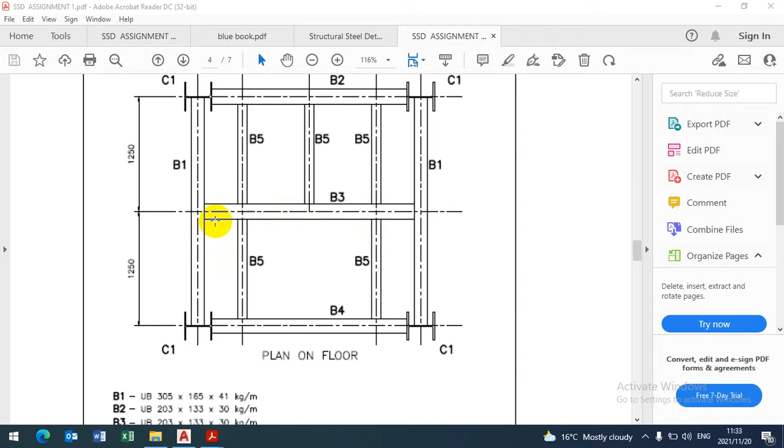Okay, so to show the notch you need to have two beams coming in like this. This will be our beam 1, and then beam 3 will be coming from the right hand side, not from the top. So we are viewing from the front. So we'll see the web with the beam, the thickness of the web is here. We'll see the flanges and at the bottom, and then we'll show the notch of beam 3 coming into beam 1. We have already done the detail of beam 1, and we are showing the holes on the web of beam 1. So that is what we are supposed to do.

So this beam 3, I'm going to move the end plate. The end plate won't be going all the way that side. It needs to be notched. Okay, so we are going to notch the beam. This is the center of the other beam, which is beam 1. If I bring beam 1 in, my beam 1 was this one. I'll copy it here, and then we rotate it in place without the holes. Okay, I'll bring beam 1 here, and then rotate beam 1 to sit that way.

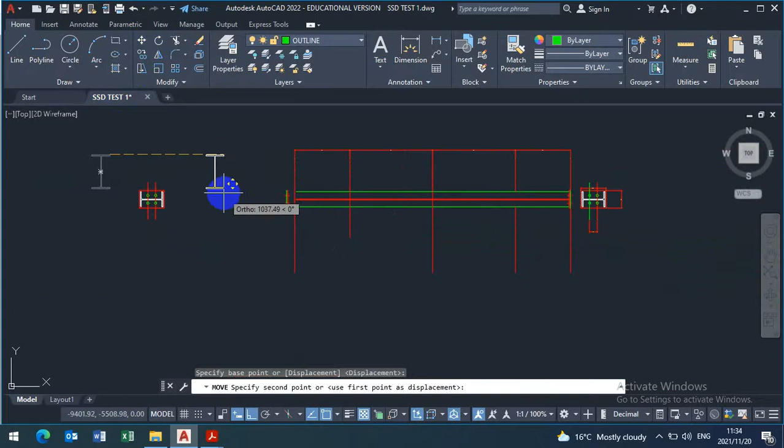It's not necessary to show the plate for beam 1 and the end plate. That is where beam 3 is coming in. I'm going to move this end plate for beam 3 and move beam 1 to align with the top of the flange here. Okay, and then that's my beam 1, and then I'll rotate this view because we are looking from the side view. We'll see something like that.

We rotate the entire end plate for beam 3, which will also change in shape. So it will be like this. And being that we are looking from the front, we are going to show the thickness of the webs. Okay, that's the top of the beam here. I'll put it here, and then you can now draw the webs. Just project from here, copy this one here, and there's already a member down here.

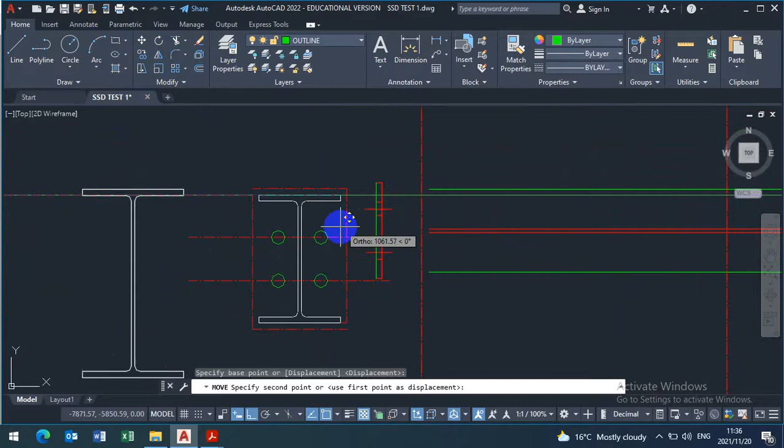This is beam 1. I want beam 3. Let's try to rotate this one and then move this member. So this one is not sitting right. This was our beam 3. Okay, and then it must be on top. So I'll move it closer to be in line with that one. The top of the beam is here. We want something like that. That is beam 3 from the front.

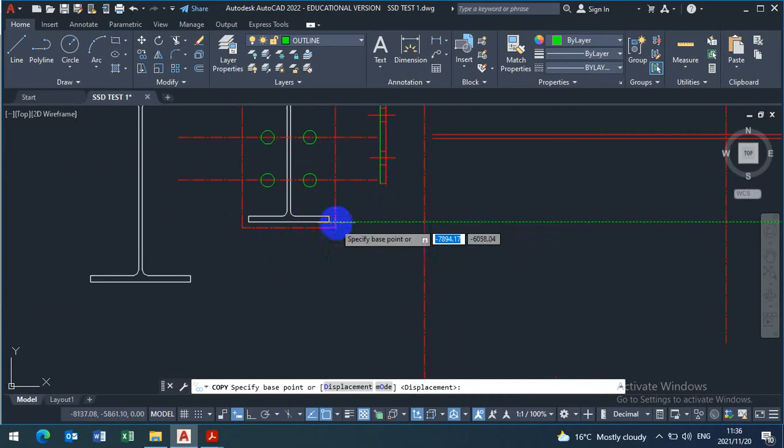Then you're going to move this one here, and then you can copy that one, because now we are on the front where we see the depth. From the top we saw the width. That's why we turned it the other way. So from the front this is the right way, and you're going to extend this. That's where the beam is ending.

Then extend your lines to meet with the beam here, and then you can now trim that part and trim this part here. And then trim. This will be out. Alright, so the thickness of these plates we are going to change. Also the position of the holes will change. We are now working from the front view. So extend.

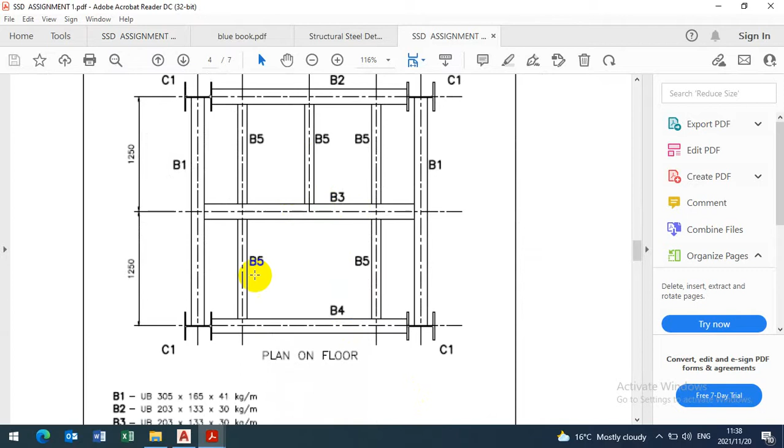Let's finish the notching part. With the notching part, you need to know that this beam here is coming in here, so you can now move this away.

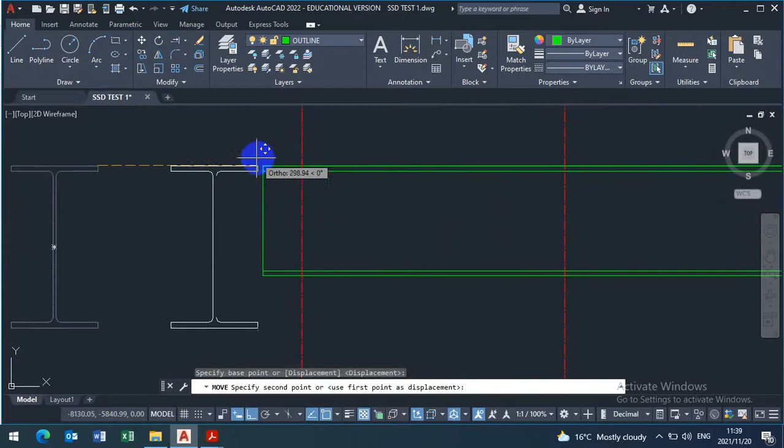The end plate detail, you can move it somewhere this side, and then try to bring this beam near. Okay, there must be a small clearance there before you notch, of like 2 to 3, so you can offset 2 to 5, they say. If I use 2, that's the clearance, and then move the beam, which is the main beam, to that point. Okay, and then we have to now notch this beam.

We have to notch beam 3. How do we know what point to notch beam 3? Because beam 3 needs to come and sit here. Okay, it needs to come and sit on the web according to what we did on beam 1. Beam 3 was coming inside here. We have done the detail of that part. Okay. The beam 1 was ending with the columns here. That was on the column.

But when we look at beam 3, I've already mentioned that it's touching here on the web. So you need to have a notch, but the notch you can't show on the top view. So if we are looking from this other side of the beam, you will see the plate here, and the plate here, and the plate here with the holes. In fact, we'll just show the holes on the web. Okay. All right, so now notching of this beam.

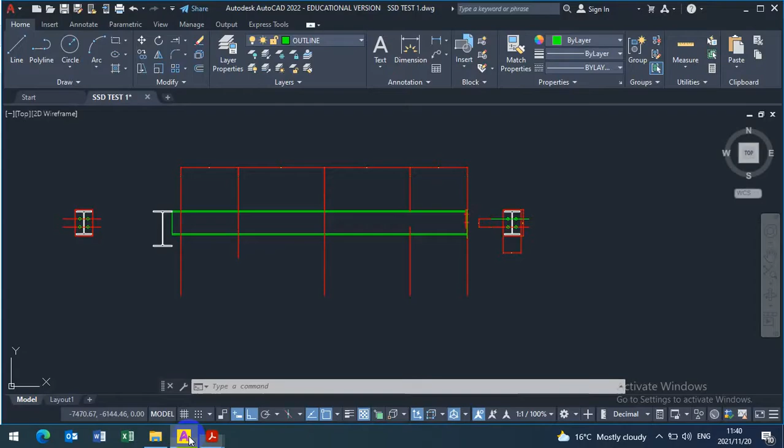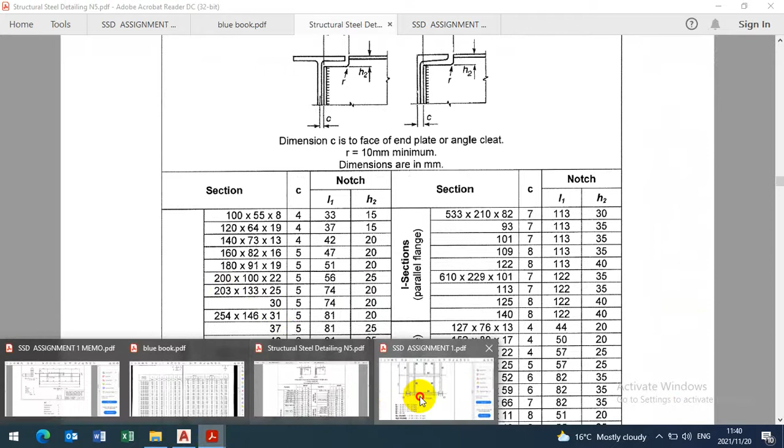What is the size of beam 3? You go to the question paper. Beam 3 is 203 by 133 by 30. To get the dimensions of the notch, you go to the blue book. Okay, 203 by 133 by 30. This is the beam. Was it 303? 305. I'm forgetting. 203 here. 203 by 133. So when we are here, we look at 203 by 133, by 5. You need to know the clearance is 5.

Okay, we are working with 5, and then there is 74 length, and H2 is 20. So you are going to offset 74 and 20 down. What is length? The length, you have to leave 5 clearance here. Okay, I will leave 5 clearance, and then from there I move the beam in there. Then from there I'm going to offset 74, and then from there we offset 20 down.

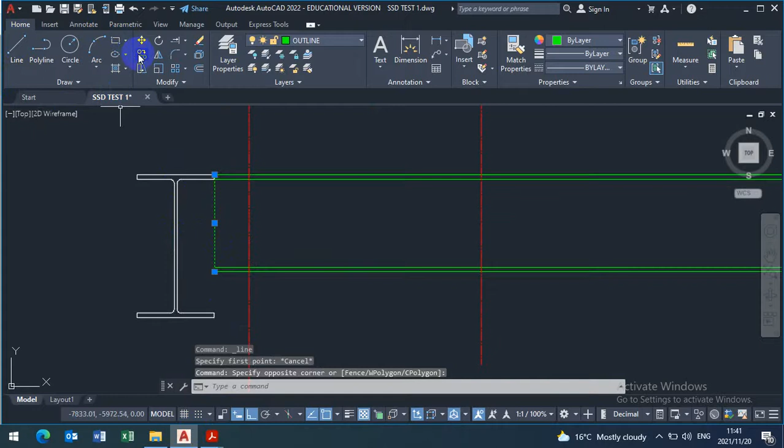Okay, so when we go to AutoCAD, you are going to have a line here. Let me copy this one. Copy, you put it here, then offset 5, enter. That will be your clearance for the beam. That's where the beam will come and end. And then offset this one 20 down, enter, 20 down, and offset this one 74. Yeah, 74. So it's on the center here, 74. Let me delete that. Then you can now trim.

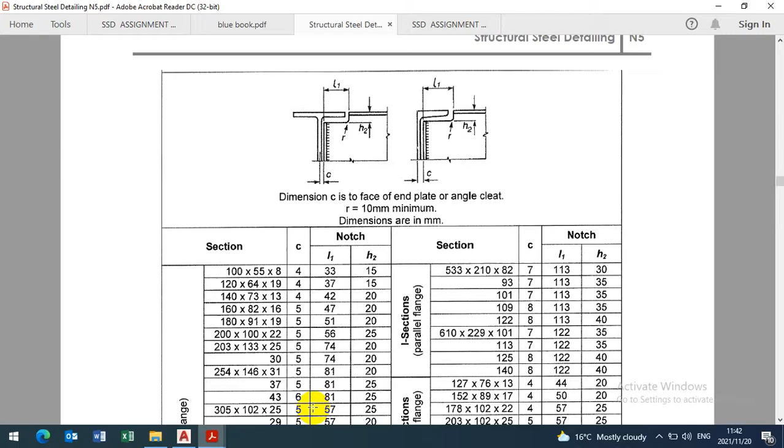So what are you trimming? You are trimming this piece away, and the notch is coming until here. So this must be trimmed, and this must be trimmed. Okay, then they say there must be a fillet. What is the fillet radius for this beam? Fillet radius, that is R. Okay, R is 10 minimum, so you can work with 10 minimum, and then we go and try to put the fillet. 10, enter. It's here and here.

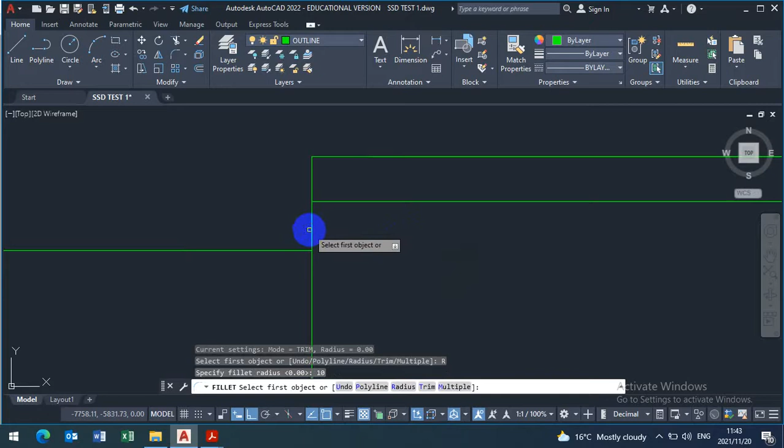Okay, undo. We need to trim this piece here. Yeah, then try to do a fillet of 10. Radius, enter. 10. Why is it not accepting? Fillet. R, enter. 10, enter. Okay, it will be here and there. That is the radius of 10.

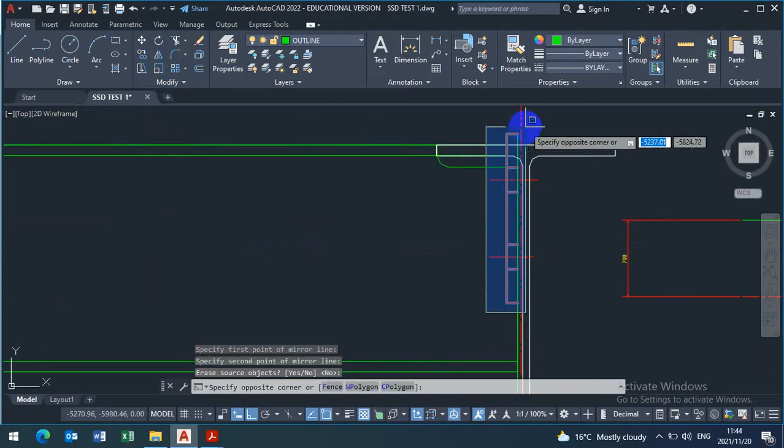Then you're going to move your beam, the entire beam, not even the beam. Let me move the column. I'll move beam 1. Okay, they'll meet here, so that you leave that allowance there. So this one we can delete. So what I've done, you can do to the other side, meaning that this one you just mirror. Okay, mirror halfway on the beam, enter. This we don't need, delete.

Then you can come and trim that one and trim that one. We don't need the column. Okay, match properties. The column was just helping us to do the connection. This is a beam to beam, so the main beam is this beam 1, and there's no need of stressing to have the beam here.

Okay, so you do that, and the details on the end plate will be shown here. Those are the details that are on the web here. So you can just leave the end plate here, and then here you leave the end plate there. On the beam here, there's going to be holes here, and then you're going to have that.

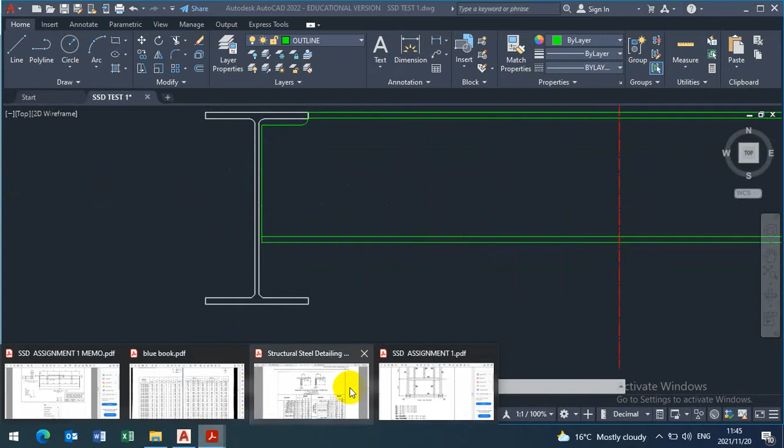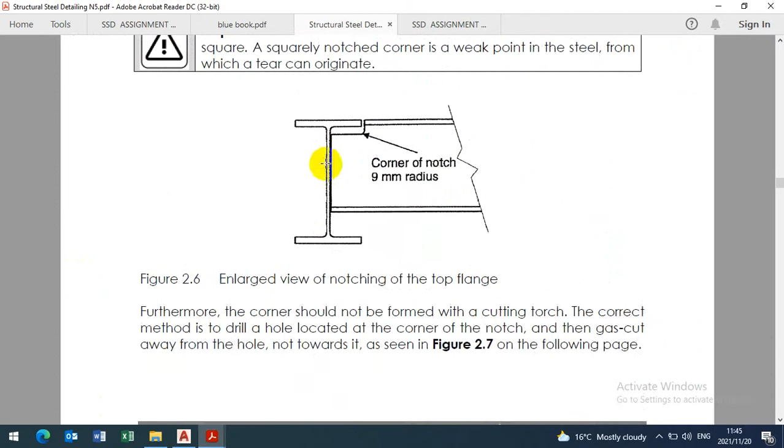What we are going to have is something looking like this in the structural book, but the notch is something like that. Okay, when I zoom in here, you'll see that that's where the beam will be attached to this piece here, and that's where the plate is. So once you leave that thickness of 5, then you can do the notch, and once you put the notch, you put the thickness of the plate.

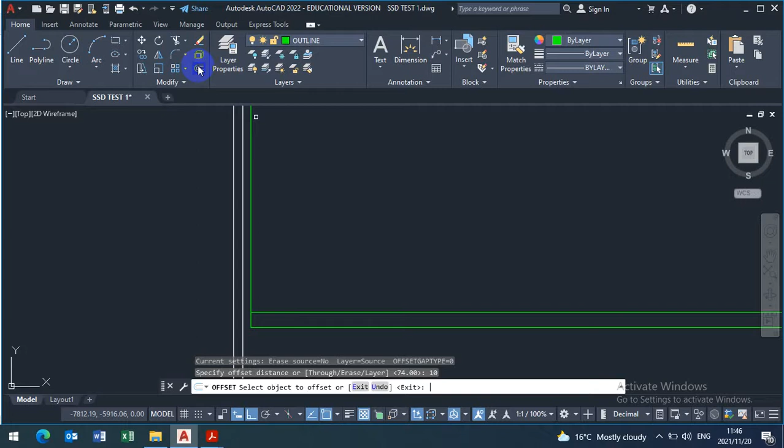So I'll copy this, not offset, I'll copy, because you still have to show the thickness of the plate, then we say 10, enter, offset 10, enter. The plate of 10 will start here. That is the thickness of the plate. So you can move the beam.

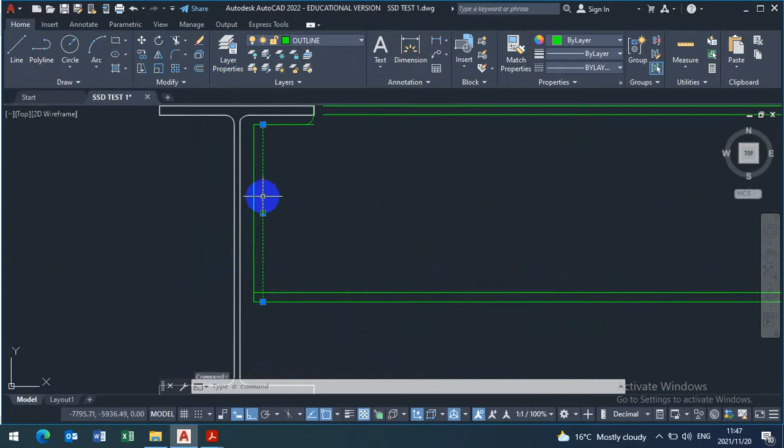Okay. Then you say move. Then you can come and show the end plate thickness. The beam will start here. Then here I'm going to bring the thickness of the end plate, which you can draw if it's 10. You're going to say offset 10, enter. Yeah, then there's a 5 left here, which is your clearance.

This is sitting here, one notch. Move this piece to come and close here, and then close that there. Alright, so we need a line here for the plate, and then for the hole position of the plate, this is the plate that we're going to have. You can either project from here, okay, but the plate won't go that far. The plate will start, I'm gonna move this plate here,

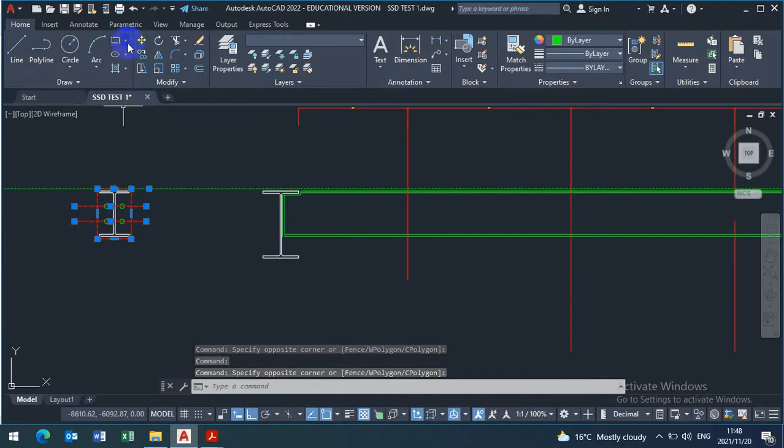move the plate so that the top of the plate can be in line with that one, or even a bit lower. You can go a bit lower to leave for welding, 10 millimeters lower. I'll put it here, and then I'll move it down by 10. The holes are left. Undo, undo.

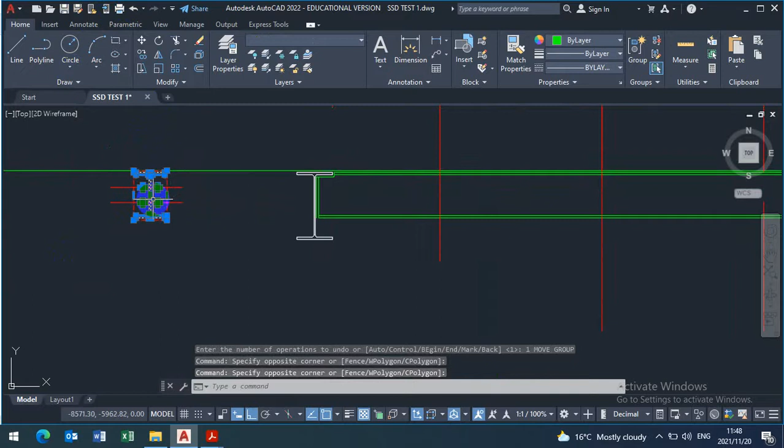Move. We want the plate to align with this top, okay, but the beam is not here. Remember that your beam is in line up here. Okay, so once you put the plate there, you have to work with the pitch. From here you can offset or use the center of the plate, and this plate is too big. Make sure that it just can go all the way up to here or even less. Okay, you offset 10 down here. That's how we do it.

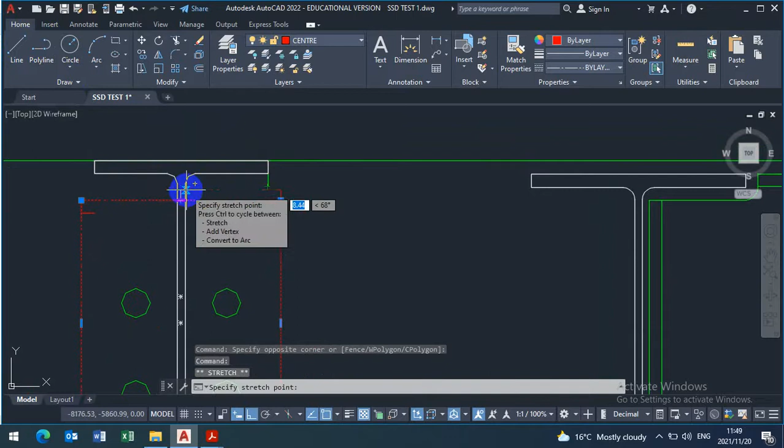So I'm going to have to draw a line here. Okay, for welding you can go 10 down. If it's 10 down, then I can bring this one here, okay, and 10 down from the edge there. It's fine. You can set 10 down, enter, and then you can move this to align with that 10. Okay, something like that. You can have a plate like that.

Then we are going to offset the pitch. Remember the pitch we worked with from the center here. So you can work with the pitch on the middle here, this line, and offset 70, but I'll offset 35, and then 35 here. You can have the hole there. If it's 35 here, no, that will be too much, and then that's where you move your holes from the center here to there.

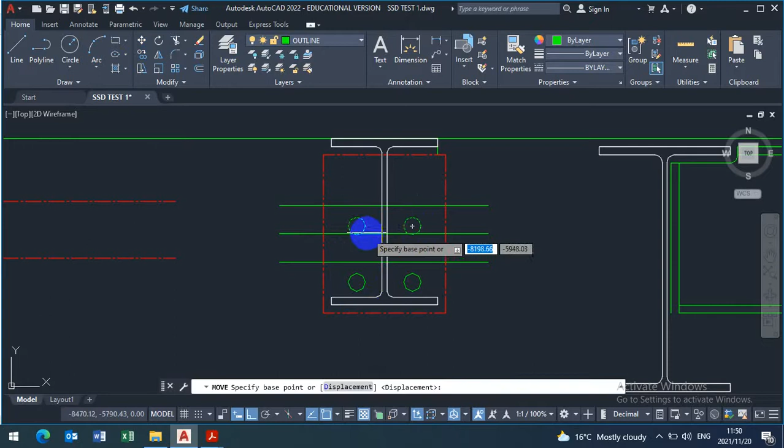Move these holes to here, and then those are center lines. You make sure that you match properties here to these centers. You can delete this one and then change this plate to construction line. Delete that, delete that.

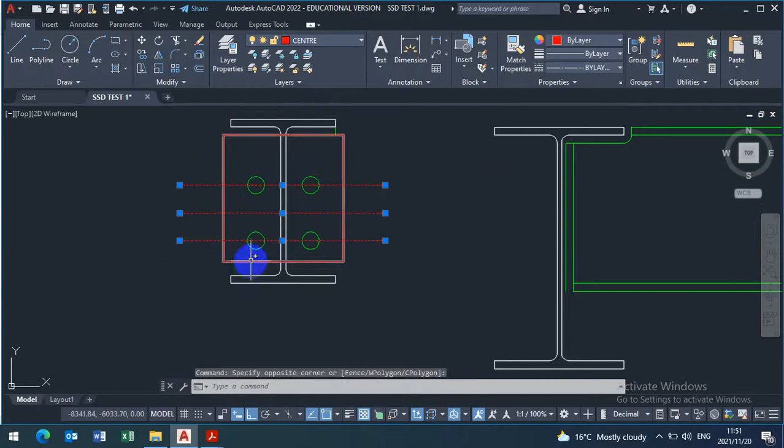So if you want to save money, what we usually do is this one won't even go up until there. You can go inside by 10, okay, the same way this one was sitting. You can come down by 10 and by 10, and then you weld it there. And then once you weld, you're going to move everything here, the center to the center here. Then you save money compared to welding everything up until the bottom. Okay, so there must be some sort of allowance left. The edge distance you can work with is 40 or 35 for this one. So let me see how much is here.

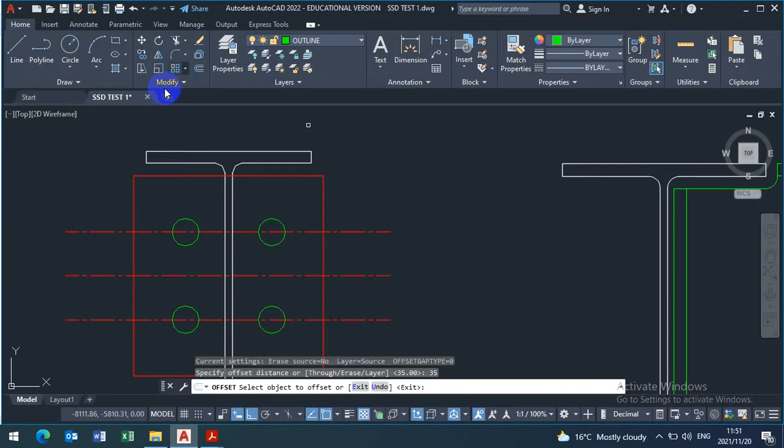So let's say offset 35, enter. If I offset this one by 35, it's up until there. So I'm sure this one is fine because that is the minimum. How much is this? 45. Yeah, 45 is better, which you also have to leave here. It will be 45. And then you show your center lines here,

and then match properties, then copy from the center to the center there, undo. You need to copy the center lines from here to there. And then once you do this, we are going to scale it down and put the dimensions in.

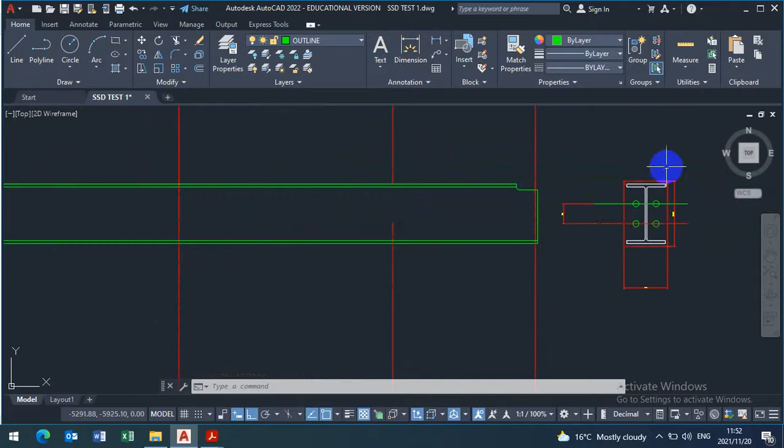Okay, please make sure that the plate is closed here and the beam is ending on here. This is the 10mm thick plate, which is this one here. We do the same on the other side. I'll just delete this. Whatever is happening here must be happening that side. So mirror and mirror on the center of the beam there.

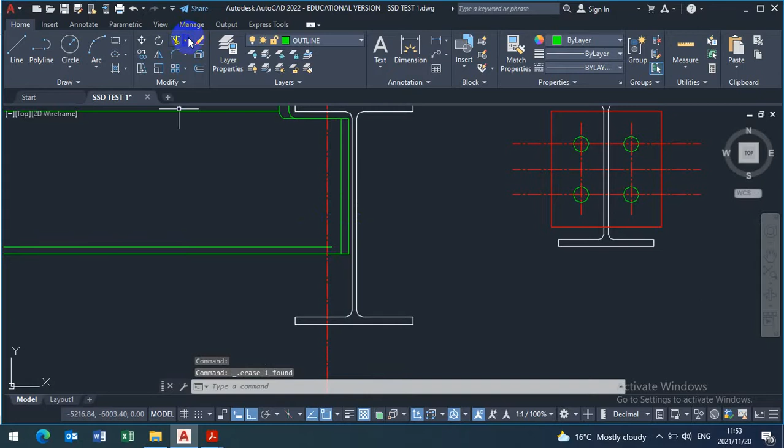Yeah. And then you can extend. This one is wrong. Then extend this line here.

Okay, so if we want to locate now the centers on which we have the other beam coming on this section, I'm going to use this as my center line. So let me move it in the center. Yeah, there. Then offset 750. That is in the question paper. Okay, and 750. Then offset 500.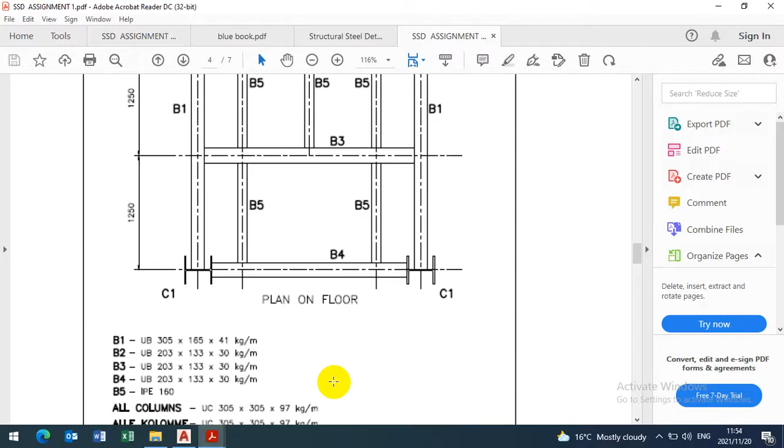So we need to readjust this beam. So 750, then 500. Okay, after 500, let's look at the question. Look here, that's beam 3 from the center, 750, then 500, 500 into the center of the other beam. So we need to readjust.

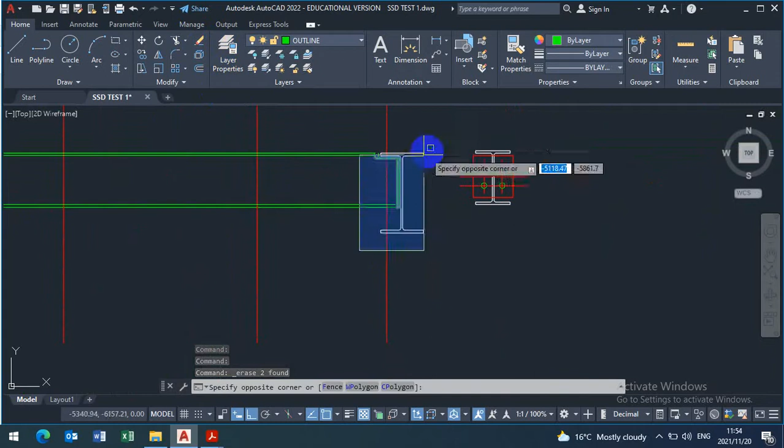The center of the beam is here, meaning that you have to move the center of the beam from here to there. That's how it is. And then you can trim the notch and delete that line. Yeah. Then this one also, you move the center of this beam 1 into this. That's the center.

And then you can now trim. This one is wrong. Okay, there are 2 lines here. Delete 1 line. And then here you also have to trim the beam. Then the thickness of the plate. This is the 5 clearance. Just confirm that it's the clearance of 5, 4.4. Supposed to be 5.

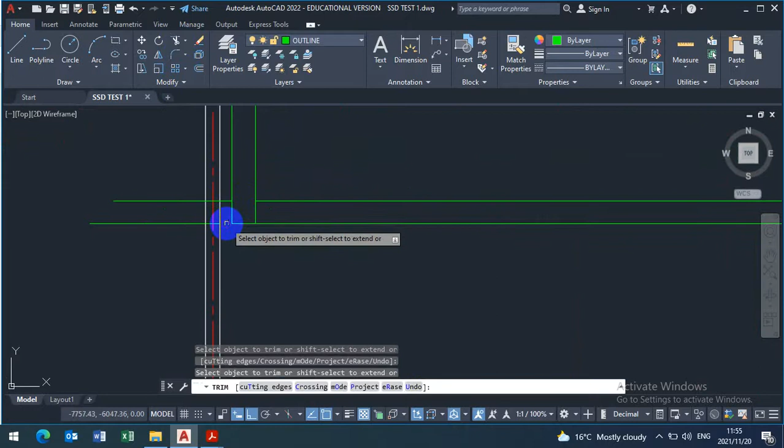Okay, I'll just mirror. Let me delete this side and then mirror this piece. Yeah, we're going to mirror this in the center here. Okay, yeah, that is the end plate. So the beam must end here. Once that has been done, you have put the notch. You need to show the hole position.

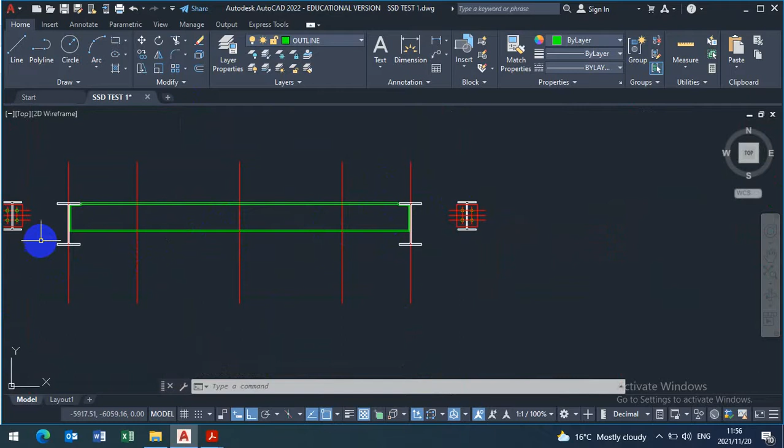Remember what's happening here. We are not looking from the top. We are looking on the side view. So we'll see the hole position for this beam that is coming here. The beam that is coming here is this beam 5. Okay, beam 5 coming from the top side of beam 3. But we are looking from the side view, so we'll see the beam as it is sitting on the center line here, on the flange. It's sitting on the web of beam 1. It's here.

So what is that? Beam 5 is IPE 160. So in AutoCAD you have to go File, New, and then you look in the parallel I-sections just at the bottom. You know, when you go to the saver, you will have to go to the symbols, SSD, then you look for I-sections, parallel flanges. Then down here you find IPE 160, this one. Okay, 160, open. This is the I-beam.

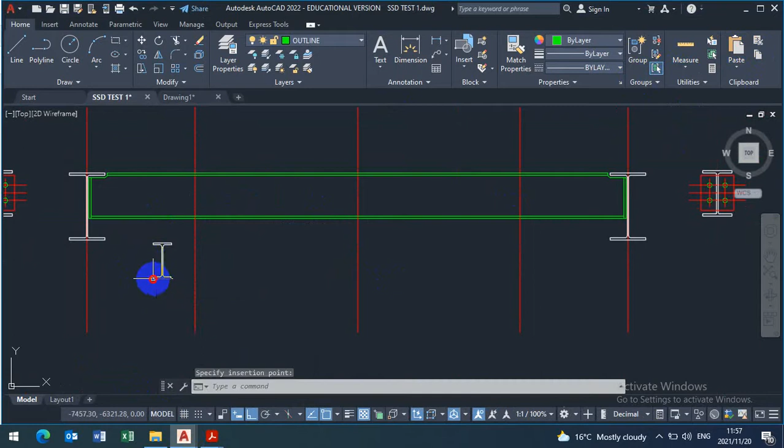Then you are going to copy to clipboard, bring here, and then you are going to paste. That is the beam that's coming here. So what we'll do is we need to center it. It needs to be in the center. I'm going to do this center so that it can now sit on the center. Okay, we'll see the beam as it comes.

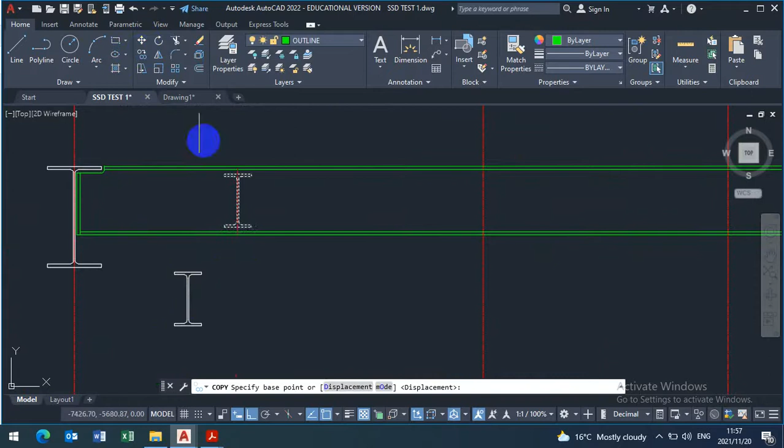So I'll copy, and this is the center that must be here. Then you copy all of them onto the other parts. There's another one here, another one here. There's no need of showing the entire beam, we just need to show the holes here for this beam. So this beam IPE 160, you need to know what is the breadth of this flange here.

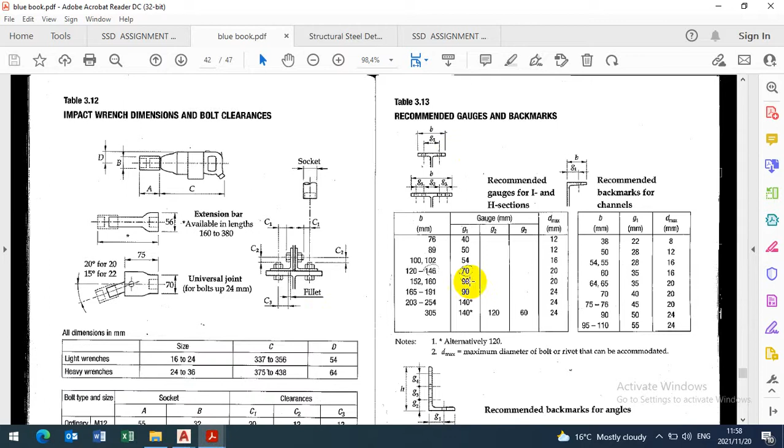It's 86. So when we're looking for 86, the gauge distance for 86, you go to your blue book for IPE. Let me say 42, enter. This is 89. That was 86. Yeah, so between 76 and 89, we are using gauge distance of 50 G1 from the center here. So it's 50. So you come back, not 50, 25, 25. It should be 50 G1 from the center. So it's 25, 25. When you go here, you are going to offset 25, enter.

There and there, and then offset from here. We are working with the pitch now. This is the center. I'm going to offset 35, recommended pitch 70, so it's half, which is 35. The recommended pitch is 70 between the holes.

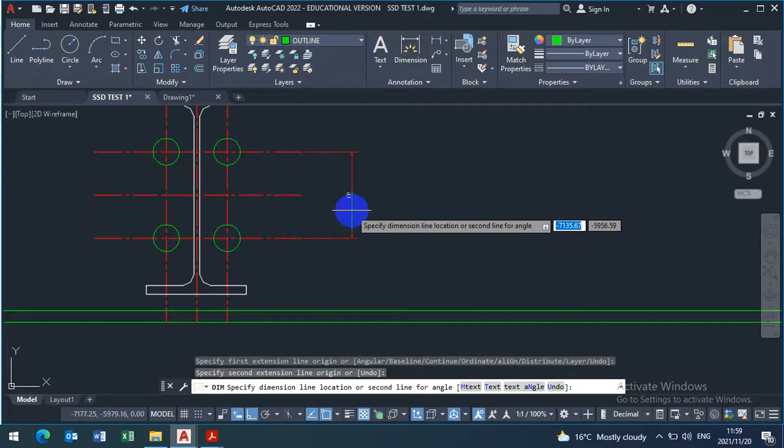So offset 35, enter. From here, let's say there's a hole, you go there, and another one here. Then I can draw a hole of radius 11. Then copy - there will be 4 holes here, one here, one here, one here, and we're saying the pitch should be 70. You can see that is the pitch, and to gauge distance that you took that side, which is from here to here, that will be the gauge distance for those holes.

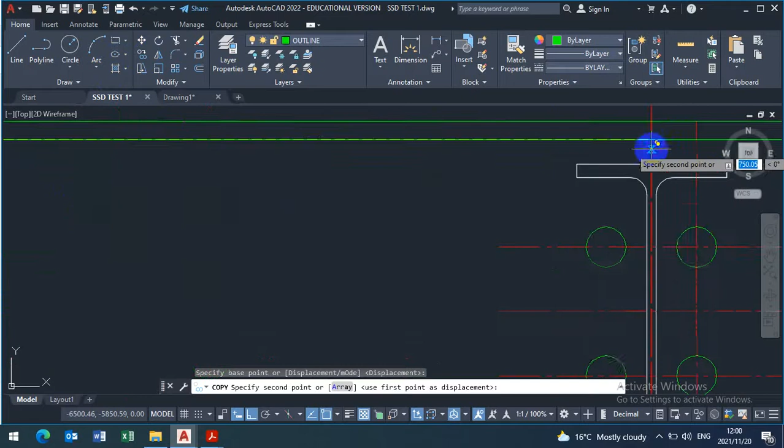You can show here to dimension. And once that has been shown, you don't even need to show the I-beams. What you do is now copy the hole positions with the center lines. Copy on the center of each.

Once that has been done, then you can just delete this beam. We don't need information now for this beam. We only wanted to know the location of the holes using this beam and looking from the front. From the top, we were not going to see these holes. We were going to see the thickness on the web.

I'm now going to delete this. And then this is the line, which is the main center line. You need to extend it a little bit out and then trim it short to come and align with that one. Must be very neat and done.

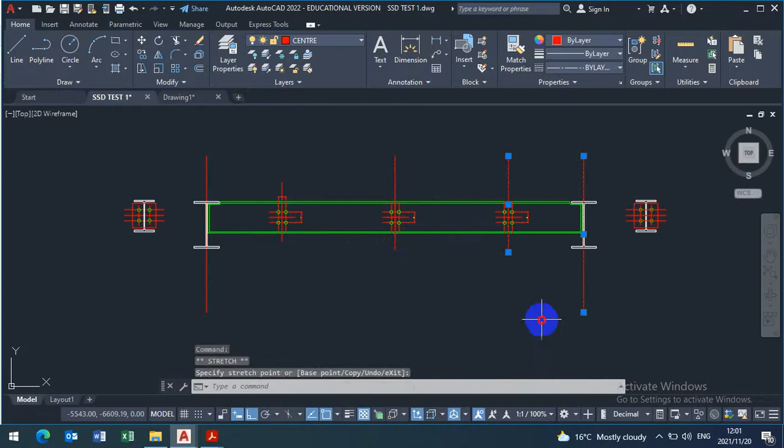Here again, we don't need these I-beams. You can just leave the center to the beam, remove the I-beam and leave the center to the beam. Also, you can try to trim.

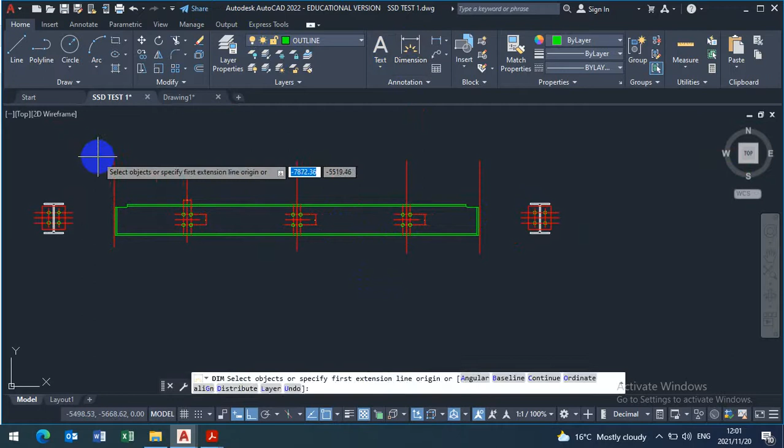Once you trim, you put in the dimensions. You see, from the center of the beam to the center here. Then you go to annotate, continuous dimension. Continue to dimension, continue to dimension. We are going to dimension here as well.

We need the dimensions of this plate. And then we need the size of the plate that side. We need the pitch. We need the gauge distance. What else? And then you put the title here.

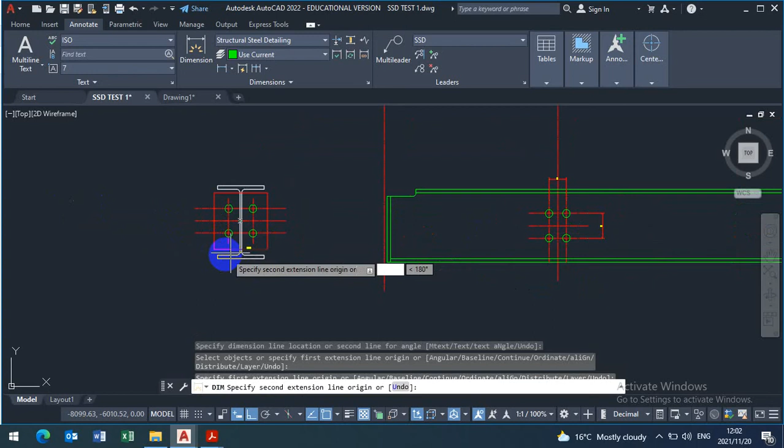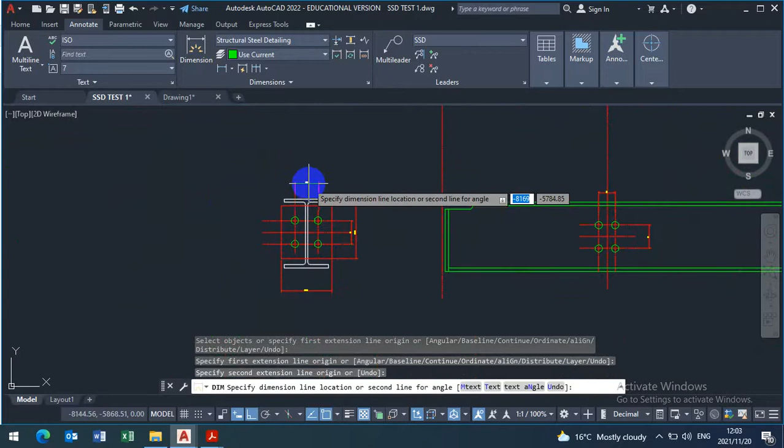You do the same for this beam here. Or else you can just have a copy of the other one, it's fine. It's the same things - the dimension, repeat dimension, pitch, repeat dimension, gauge. What else? Alright, and then you put the text here.

You come here, but before you text, you need to scale this beam down. This beam 1 also, it's the same situation. Make sure that you dimension it. That was the example for beam 1, and then it was viewed from the top.

It was viewed from the top, so the center here must be in line with the center of this one here. That's where the web is, but must be outside there. Then try to shorten that.

And then we put dimensions. The beam dimension is the beam distance from here. We need that distance of the beam - they will cut this length for the beam. Then we need the center to the column. Beam 1 was going into the column web, and the center was from here to there.

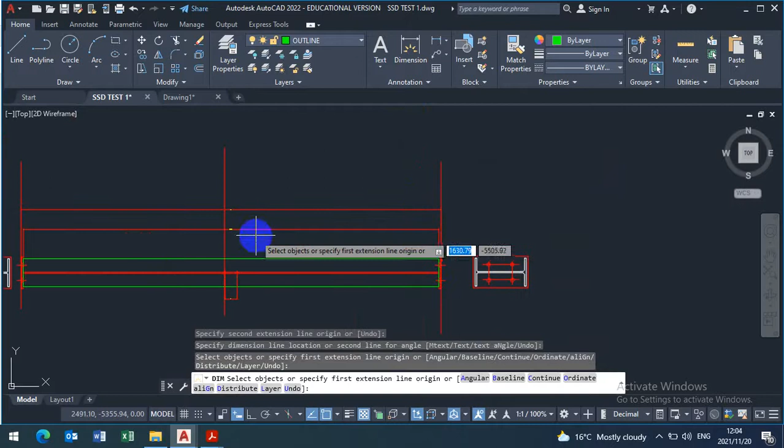You need to leave the column centers. And then you show the distance here. Try to make them neat and short. And then we put the plate size.

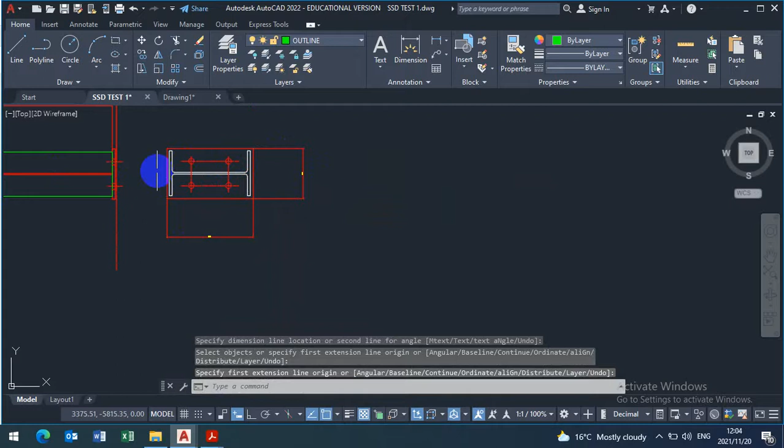This plate is looking from the side, remember, not from the top. When we go to the side here, from the right view, looking from that side, you will see this plate, and it's sitting upright - not the way I've put it, it's sitting upright. From the front view, you'll be able to see the length from here to here. But this is from the top - we are saying from the top, we are only seeing the top here.

Then the position of the other beam was here. So you need to move the center into the center of the beam. And then you also have to put the dimensions now from the center of the column to the center of the beam. And doesn't look alright.

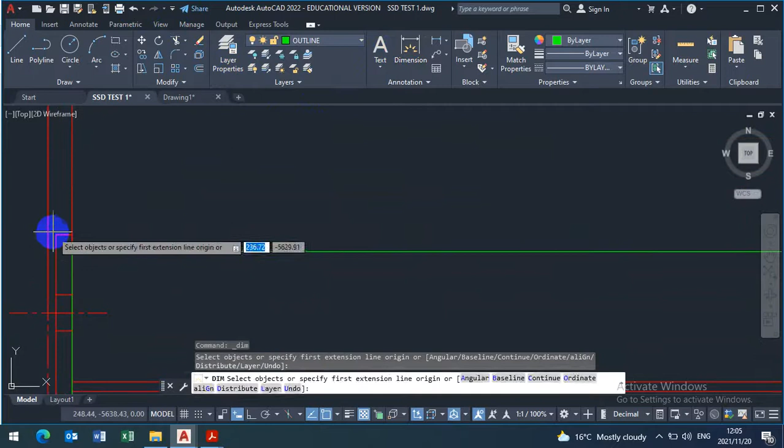Dimension. I can dimension from here to here. Then you can go and annotate continuous dimension, then it goes to the other end there.

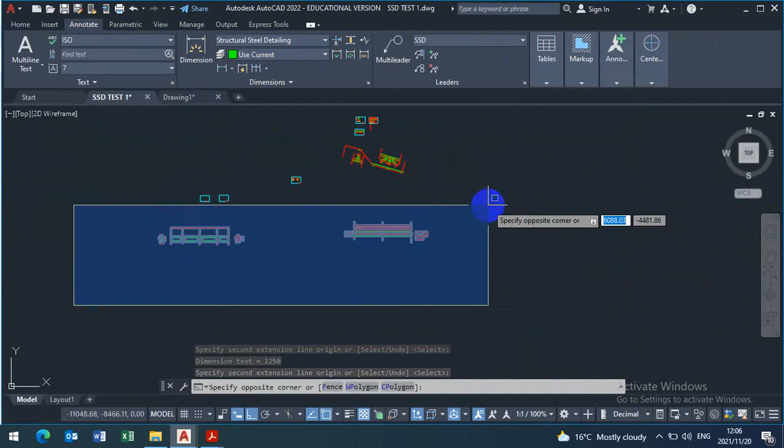So you are going to scale down both of these to scale 1 to 10. Select, scale, 1/10, enter, and then bring the template in.

Click here. This is for question 2, and bring this template here for question number 1. Question 1, if you can't see the dashed lines here, this should be hidden details.

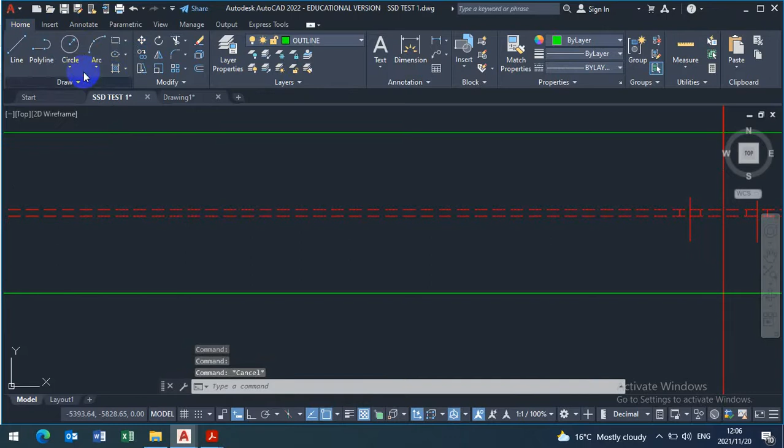You can go to File, Properties, and try to play around with that - 2, enter, again maybe 5, enter. Then I'm able to see the dashed lines, and then I can match properties from here and anywhere else where I can see dashed lines.

These are hidden details, but you won't be able to see the hidden details. On this other side, the hidden details are, okay, we won't see. There will be holes here which are hidden details, and you need to project the center line.

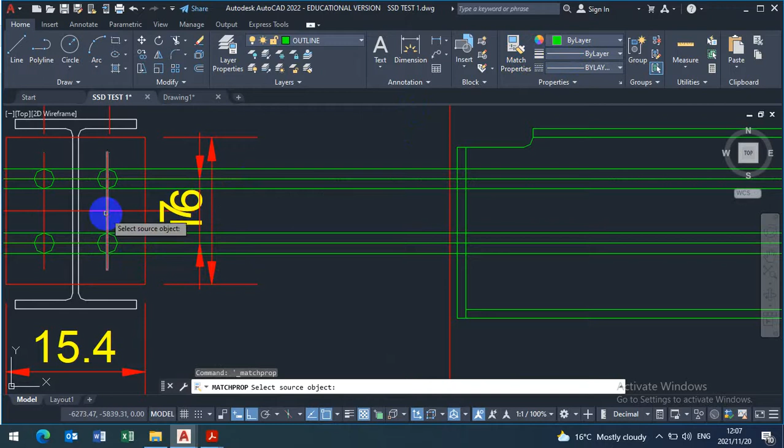Okay, and this should be center line. We'll copy to the top here, center there, match properties, center line to center line to center line. And then match properties, hidden detail. I'm going to match from here, this one to these other ones. This will be hidden details, and then you can trim.

Trim there, also on the other side, or else you can just delete and then we are going to mirror. Okay, I'll delete all of that and then I'll mirror from this end here.

Oh, it was supposed to be trimmed here on the plate only. Okay, these hidden details will be ending on the plate. Center can go over, it's fine.

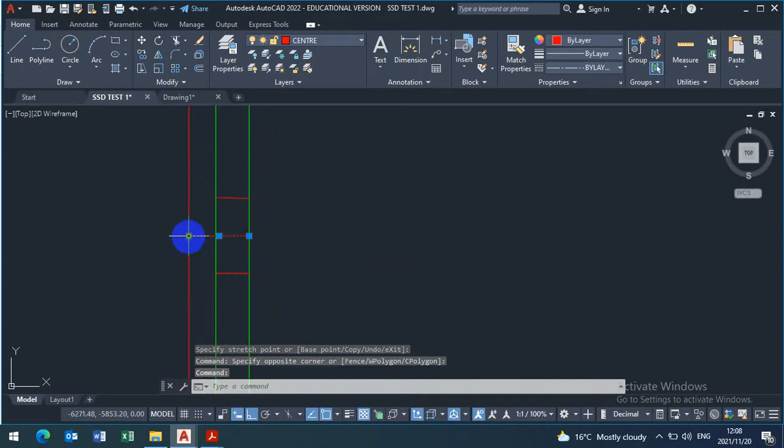This we trim until there. The center line, please make sure that you try to lengthen it. Even that way is fine. Okay, I'll try to be here and there. Don't go over the other center line. Yeah, leave it like that.

And once this is done, you mirror to the other end. Same mirror using the center line here, midpoint. Enter. Okay, and that is the detail there. You can move it near.

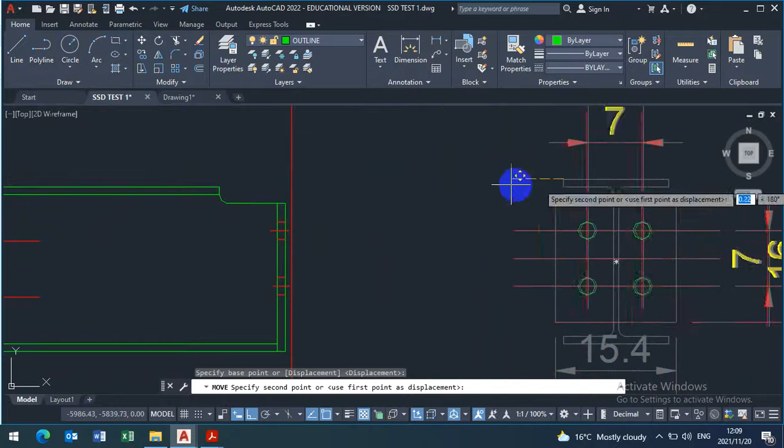Next is to type here. You go to text, then you're going to text here. It's fine. You say 10 millimeter plate width.

Diameter, you are going to put diameter 22. So at that point you are going to insert a symbol for diameter, degree, for diameter 20 with diameter 22 holes. Okay, 1 off. This is one plate, 1 off.

Okay, and this one should be under text. Then you can just copy this one here and put here.

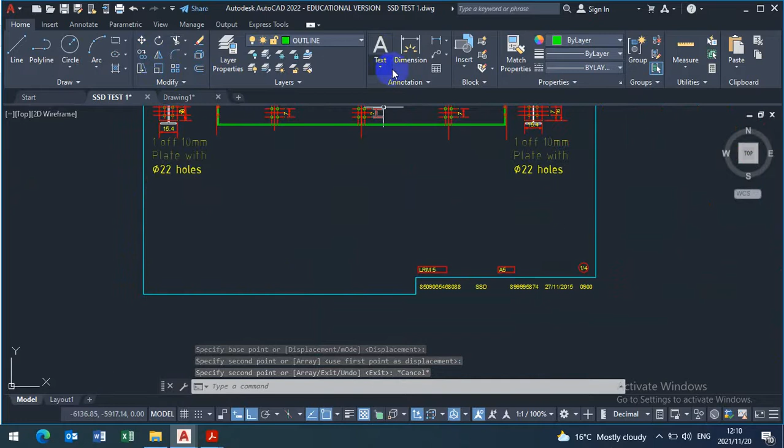Then you come down here and do the next text for the title of the beam. The size of the beam, beam 1. Okay, universal beam, UB, and then you check the size of beam 1, 305 by 165 by 41.

305 by 165 by 41 kgs per meter length. 1 off. This beam is, there is only 1.

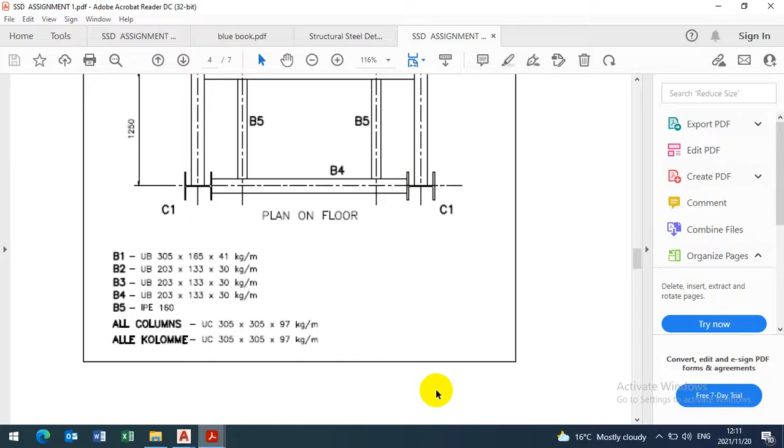If there are 2 beams, beam 1s, let's check. If there are 2, you say 2 beams. There is another beam 1 here, so it's 2 beams of beam 1. Okay, they will cut 2 beams of the same size, so you say 2. You bring here 2 off universal beams.

This one should be size 5 millimeters high because it's the main heading. 5 or yeah, it's on that one. Or you can right click, go to properties and go and change the text under text size. Yeah, it says 7 or 5 is fine, and then put it under text layer, and then move it nicely there in place.

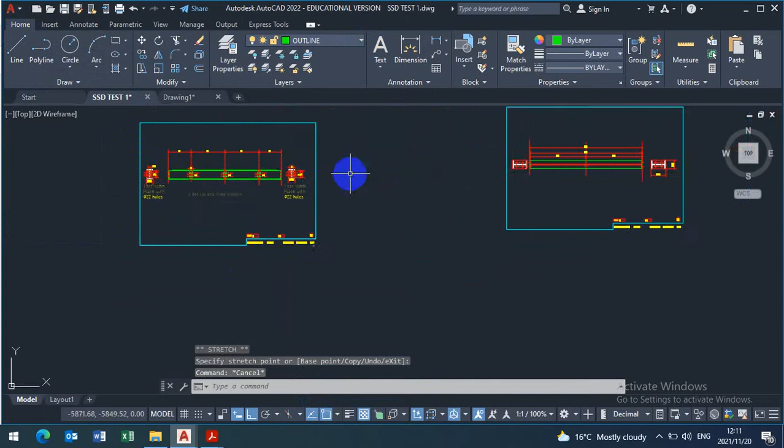You do the same for this other beam, and yeah, if there's anything, these dimensions must go back to original dimensions. We have scaled down and the measurements are wrong. This is not 5, this is 70, this is 50. So what do you do? You select this.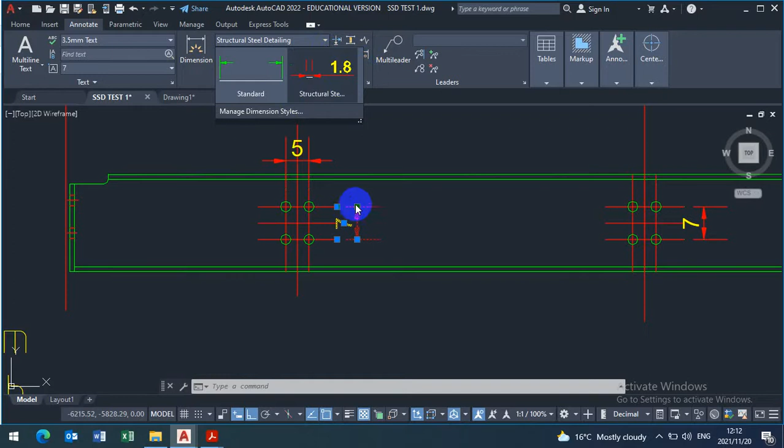You can first check on annotate and then go to scale 1 to 10 if ever there is one. If there's no scale 1 to 10, you have to go to primary units. Select this, right click, properties, you go to primary units. There's primary units, and change the dim scale, this one, dimension scale.

So you select the dimension, right click the dimension, then you come here to dim scale and change it to 10, because you use scale 1 to 10, and then it comes back to the original.

Then for the rest, you have to match property from this one, which is correct. Match property to that one, to that one. All of them you can highlight like this, to this one, this one, this one.

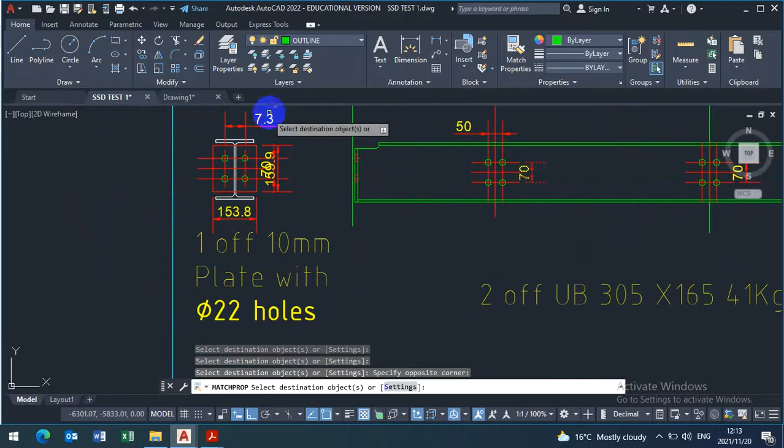This is not allowed. I'm going to clean up here. Okay, this should be 70. Something happened. 70, 70. Okay, dimensions must not be, you need to drag them down.

Must be very neat like that. Then move this one out away from the 70. Make sure it's neat. Then continue matching properties. I see this one here is not changed.

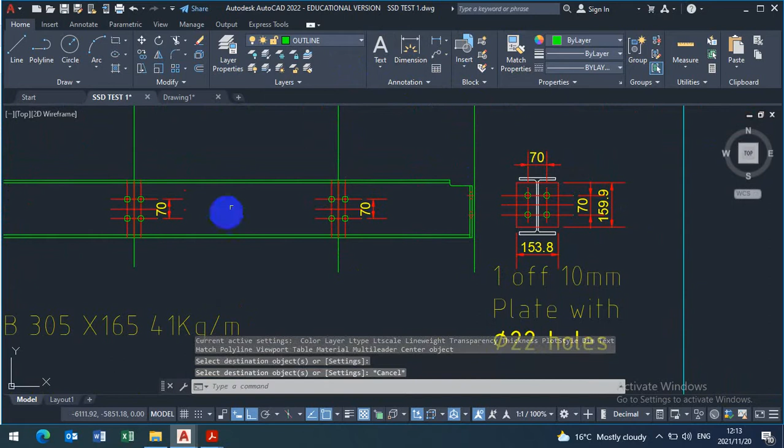Then you can dimension also this one, and then you match your properties. Match properties. This one to that one. Match properties. This one to that one. Where else? You need to also do here.

And then match properties.

Match properties from here to there. This one is not allowed, you need to clean up. Take this bigger dimension, drag it out somewhere there.

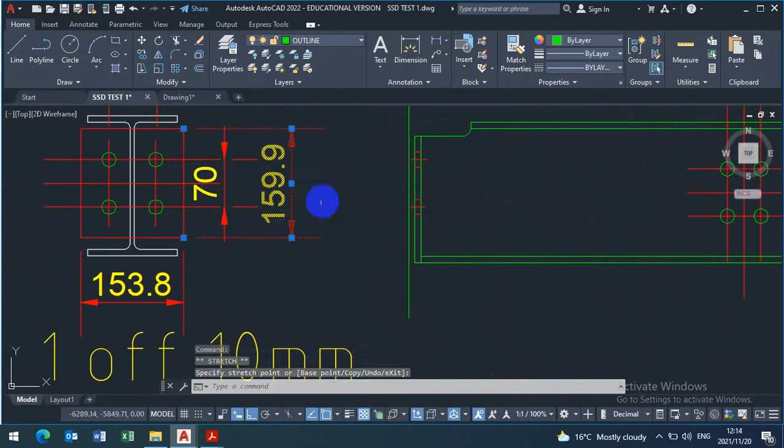Okay, this center line is not needed, you can delete. We have another one here, you can just delete.

If you can't see the centers, select the line, right click, properties, then increase the linetype scale, maybe 5, then press enter. If it's not 10, enter. I see it's still not showing. Try to go back to 1, enter.

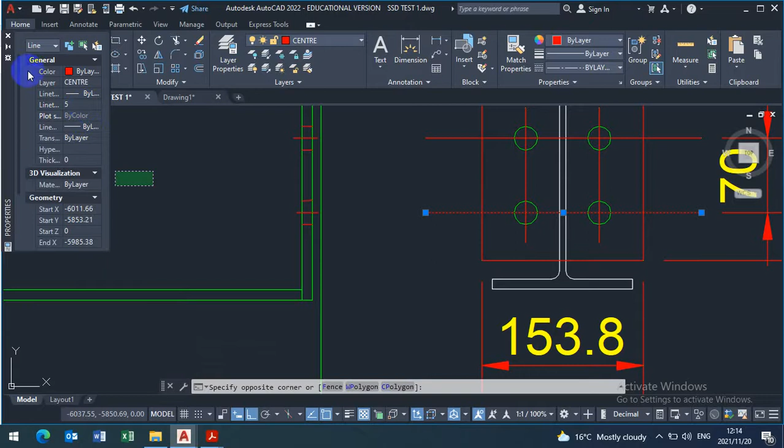5, enter. If you see that it's still not accepting, you need to look for a center line, like this one, then you match from here. Select this center line, match properties to the other ones.

Yeah, it's still center, so you need to reduce the dimension, the distance in between. 5 maybe is too much. Enter. Let's see on what scale it is on.

Select, right click, properties, try 0.5. Enter. Yeah, there 0.5 is accepting. So you can now match to 0.5.

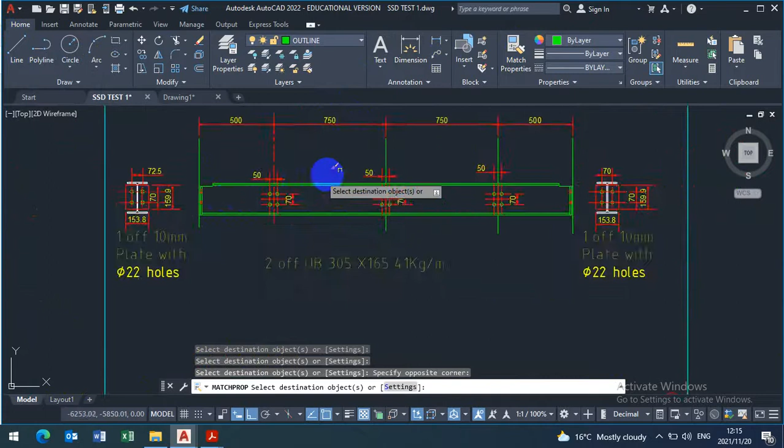And that one, and the rest of the centers. Yeah, this one 0.5, which also will be the same to these ones.

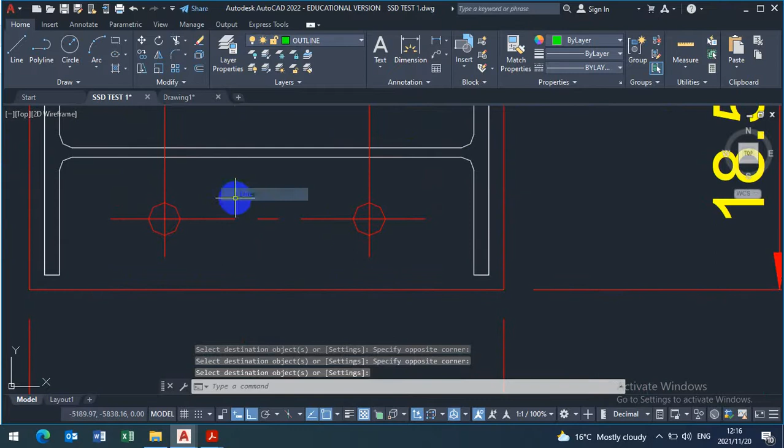Okay, and that's how it is to be done, guys. Next session I'm going to explain how you do match properties, how you do the columns, and answer question 2, which was the column question. That's the one I'm going to help you next time.

So now what you must do is print. If the work is finished, you edit here, double click and put your ID number. Double click, put the date, these things you must do during exam. Otherwise, if we wish to print this, you go to file, print, choose the printer.

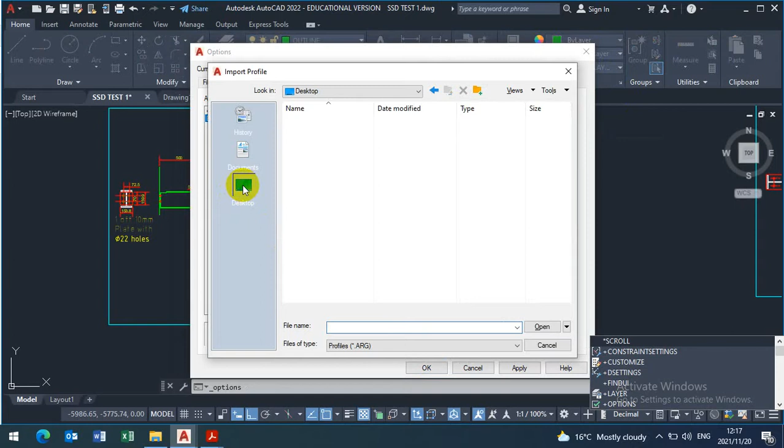When you go to options, you go to profiles, then import, then go into the server that will be on your desktop. You open server, and mine is not connected, so you go to public.

Inside public you will get this drawing, which is your DWG. I think I've put it somewhere, I'm not sure where I put the DWG drawing. I do not have it, that's why it's missing plot style.

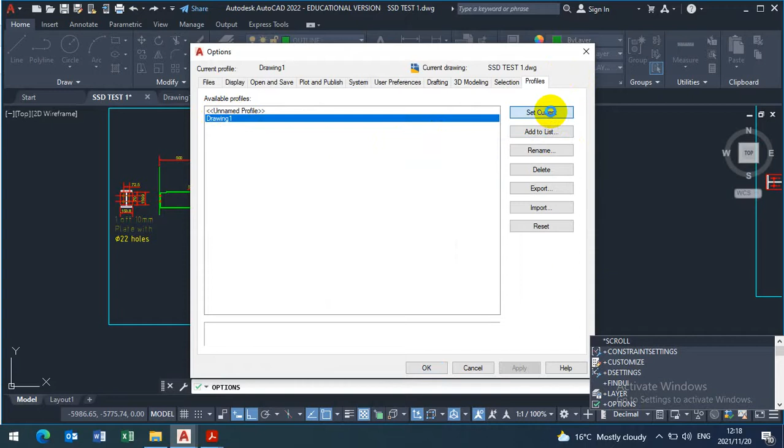So you get this drawing, drawing 1. When you bring it, open it, it will come and appear here. Then you say set current. And once you are done, okay.

Then whenever you try to print, it will show. Then you go to print. Mine is still not showing because I'm not on the server. So choose the printer name, Toshiba Staff Room, window. You are going to click there, select window and to the other corner.

Then you can preview. Why it's looking in color? Because I'm missing the plot style. You don't have to have it in color, it will be very faint and you might fail the exam. So you need to go back and fix your plot styles.

Okay, you make sure you fix your plot style. Once the plot style is done, then you can just click on print. That's how we do it here. So mine is printing, but unfortunately it's going to be very faint.

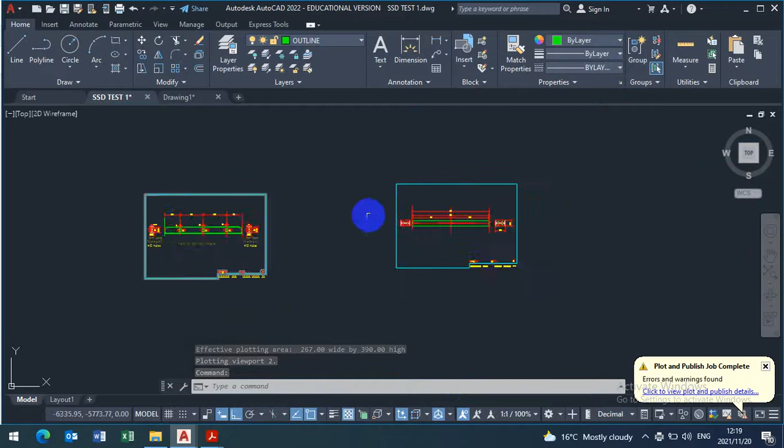That's how you print. You say question 1, you put the question number, question 2 here. Question 1 is this one, which was beam 1. Remove it here, and then there's question 2. Put the title for this one, put the information for this one.

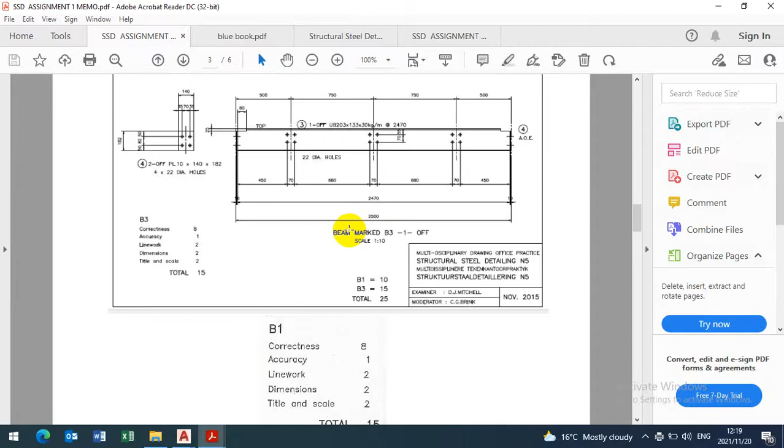In the end, guys, the memo is here, SSD memo. This is question 3. Question 1, beam 3, there's beam 3.

They have worked with 80, it's fine. We worked with 74 according to, and we worked with 20 deep here. There are the 22 holes here. There's the beam center, okay, you can see the 500.

One of universal beam, 1, 2, 3, 4, these are the 4 holes, okay, for that I-beam. Yeah, and they have worked with the pitch.

Then which other one? Yeah, this is here, and the pitch is 70. You can also work with those numbers as long as the edge is not less than 35, it doesn't matter. So this is all you're supposed to do on the total length. That's how you get the answer for the beam.